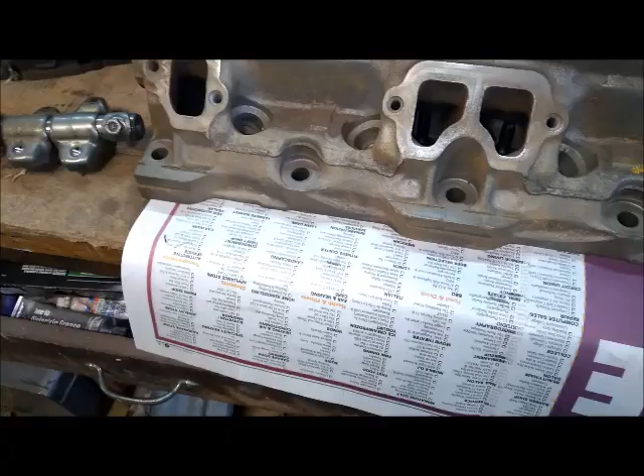I want to talk a little bit more about these 360 heads, I'll call them. So the J head. We're going to check the casting numbers. I have a book here. We'll look at that.

But the casting number is 3418915. I don't know if you can see it right there. 3418915. These are the cleaned up heads that are on my engine that I'm saying have 188. Well, actually, I know for a fact they do. These are an early 70s 360 head, but they're also a late run 340 head.

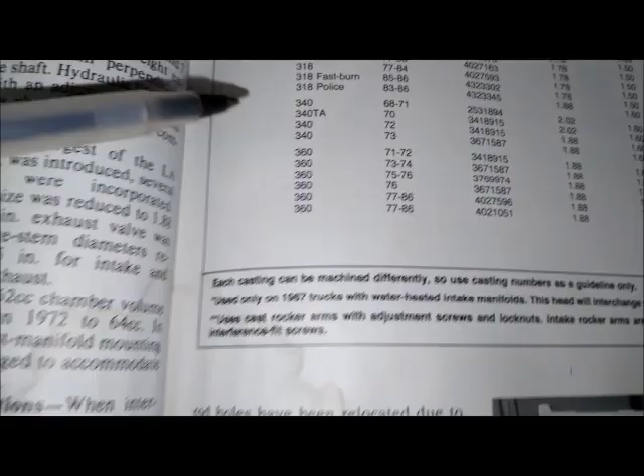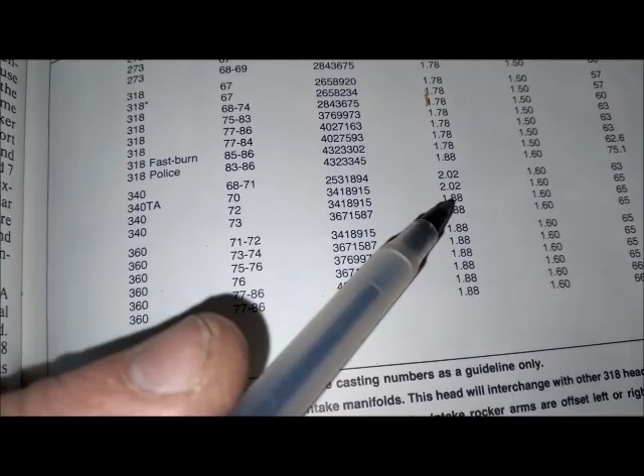So let's look at the book here. So we know they're 915 heads. Let me get a pen so I can point. So looking at the book, 340 1972 had 915 heads. So 188 intake, 160 exhaust, with a 65cc combustion chamber with a non-adjustable valve train. So that's your shaft mount rockers, the lifters pump up, tighten everything up.

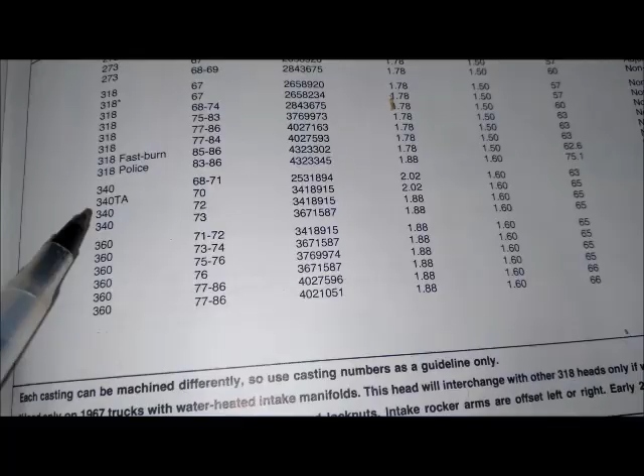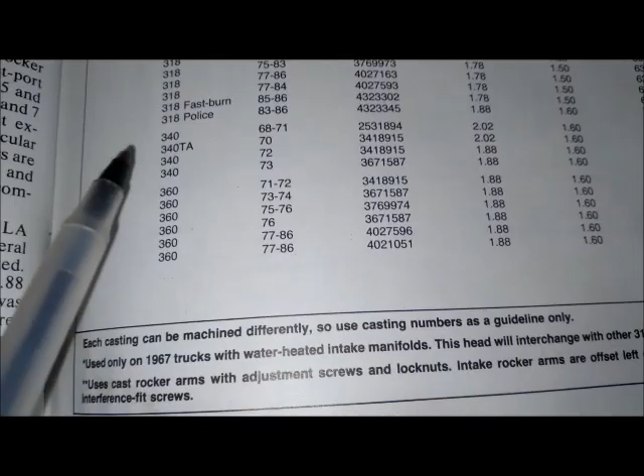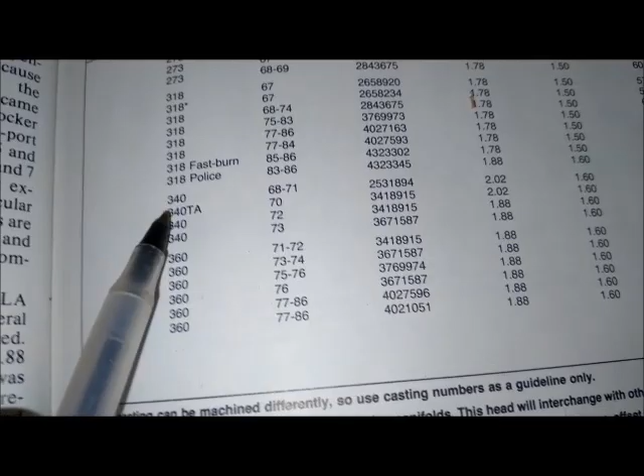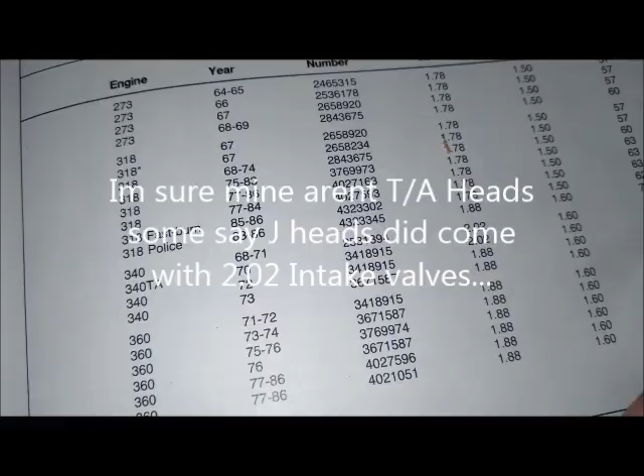360, 71 and 72 had 915. Same situation, 188, 160, 65cc combustion chamber. Now, I have an identical casting set of heads over there with 202s in it. The 70 340 TA had that 915 casting with 202s, 65cc chambers. I do not believe those are TA heads. I do believe they were possibly 72 340 or 71 72 360 with 202s installed. We will take a look.

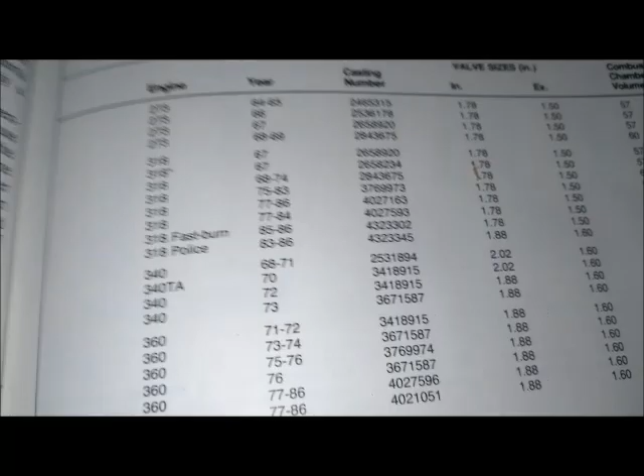Some people have said that some of the J heads had 202s, and this is like old heads that were around back in the day and actually tore these cars apart when they were a few years old. But let's turn this up and we'll look at the valves.

Oh, should wear gloves when you're handling castings. Your hands will get boogered up quick. All right. Any type of mechanics glove like that. I just didn't have any on. And my fingers got pinched a little bit.

All right. So those are your 188, 160s. Over here, it's dirty, but these are 202, 160. I'm trying to see if I have any way I can clean this up.

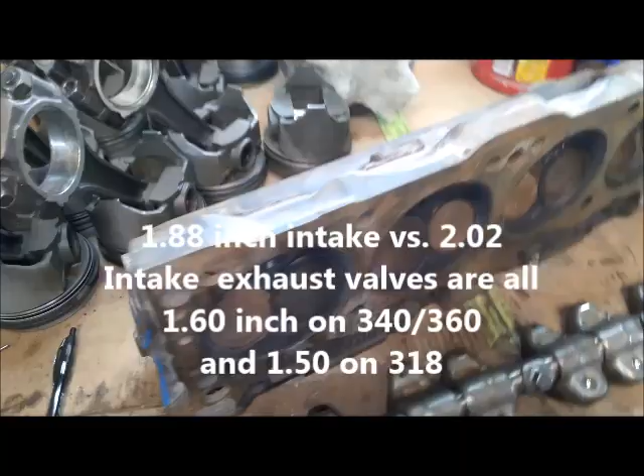So I picked these heads up. I started this 340 build. I was going to get those J heads redone. And I came across this other set of J heads with 202s. And I picked them up. They were less than 300 bucks. So I don't know the condition yet. Like, say they were 285, whatever they were. If I can't rebuild them, then it's 285 out the door, but that's the gamble.

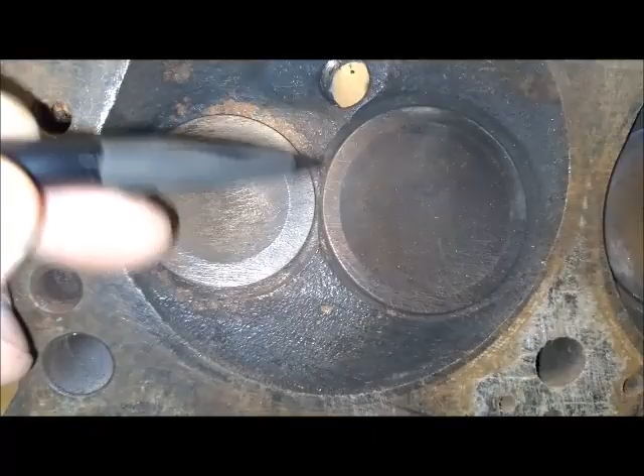These are the 202s, and if you can see, very tight space in between. It almost looks like the valves are touching. The 188s has more of a visible area of metal between the valve seats.

So that's the scoop. Like, if you look naked eye, you look at a set of heads, looks like the valves are touching each other. They're 202s. I don't know if you can see the difference there between the 188. I can see it right there. You can see it with the naked eye, the bigger intake valve.

So while we're talking about these 65cc combustion chambers, right? So this is the problem putting these heads on an LA 318. The LA 318, at top dead center, the pistons were not zero deck height. They were like negative deck height, which means at top dead center, the flat top piston's still down in the bore.

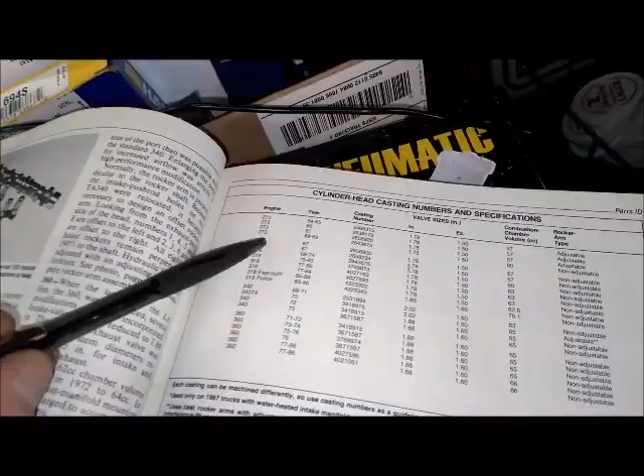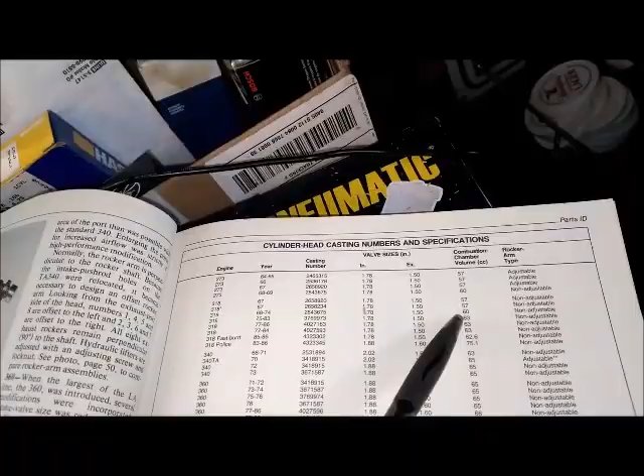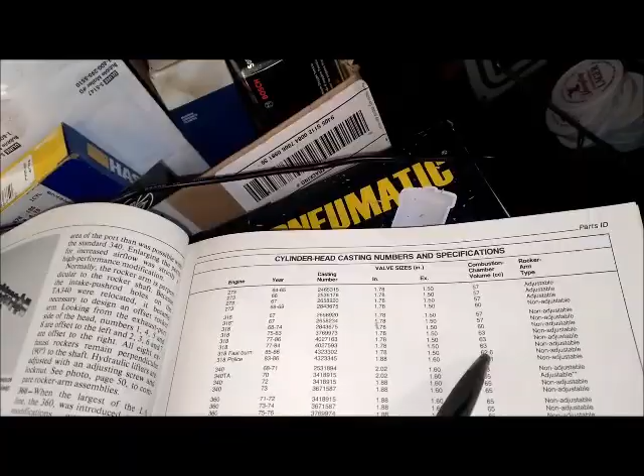So the 318, let's look at the compression cc's of 318 heads. 67, it was 57 cc's. 68 to 74 went up to 60. 75 to 83, they were up to 63. 77 to 86, they were at 63. 77 to 84, they had a 63 cc chamber. 318, 85, 86, they had a fast burn, 62.6 cc's. The 318 police, 83 to 86: 188, 160, 75 cc's. That was actually a modified J head.

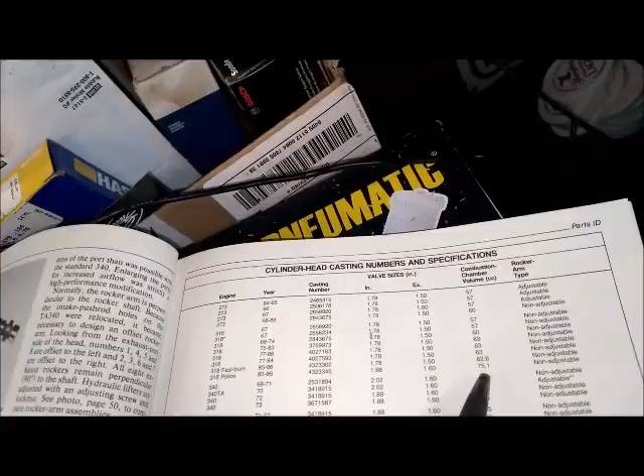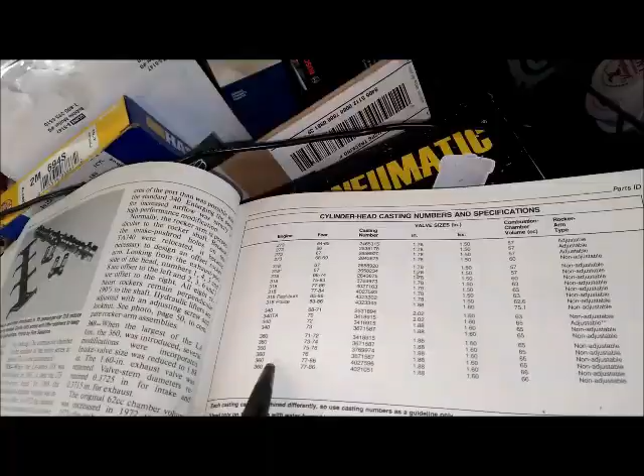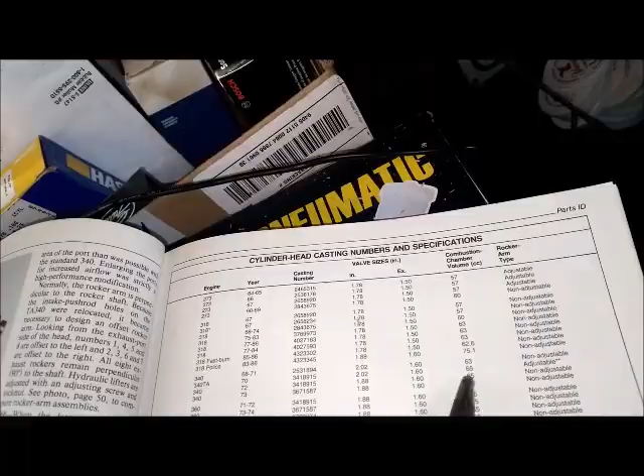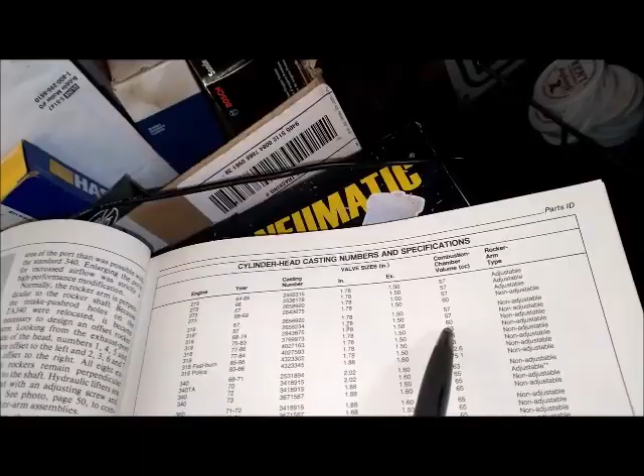But point is, let's say you're taking a 68 to 74 318 with a 60 cc chamber. You throw a set of 340 heads on. The J heads are bigger, 65. The 68 to 71 340 had a 63 cc chamber. I believe those were the X heads. So say you throw these later 360 heads on, they're 65 cc's, and you're going to throw it on a 68 to 74 318 with a 60 cc head. You're adding 5 more cc's to your compression ratio, if that makes sense.

You're making everything bigger. You already have negative deck pistons, so you're effectively lowering your compression ratio. That was the thing. You throw these heads on a 318, it opens them up for flow, but you lose compression ratio. The early 318 was already like 8.5 to 1. So that's the thing with that.

Another thing with these heads, we're going to look at the, let me see if I can lower this down without smashing my fingers.

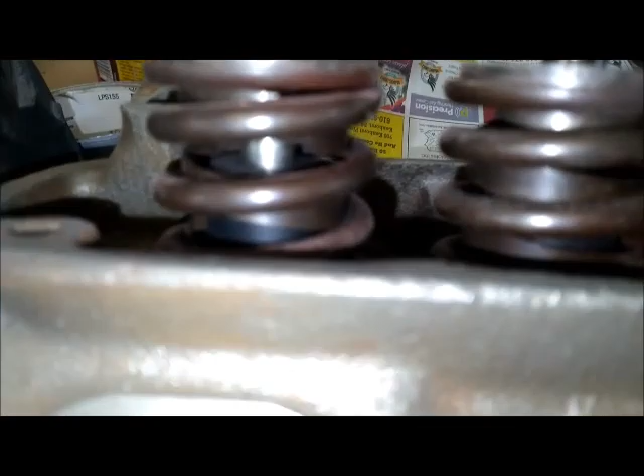If you look in there, those are dampers. These could in effect be called double springs, but there's a damper inside this larger coil. Your LA 318s will have a smaller diameter single coil.

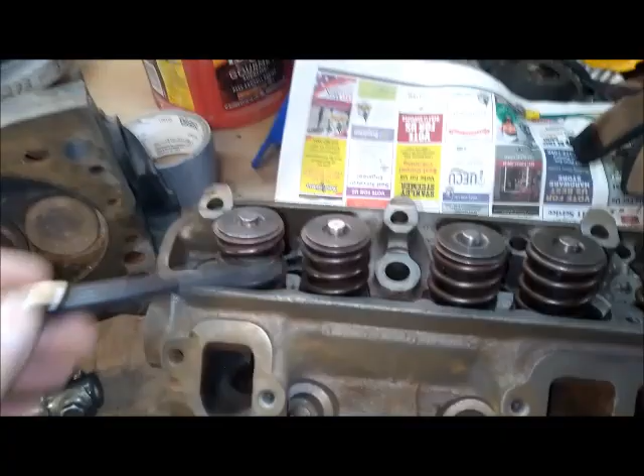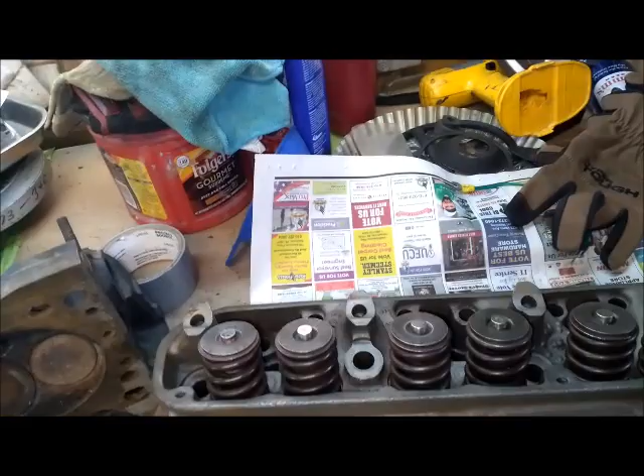And keep in mind that the 318 two barrel had like a 400 thousandths lift cam. It might have been less than that, high 370, 380 thousandths lift. So they weren't high lift, they weren't high rev. So you put a hot cam with standard LA 340 heads and you try and rev it, you might run into valve float situations because of the springs.

That's another thing. The stock LA 318 heads, in my opinion, are one of the biggest problems trying to get performance out of a 318. It'll run good, it'll sound good, and it'll do a burnout, but you're running it down the track. Anybody racing a 318 successfully has good heads on it. They're not running stock 318 heads.

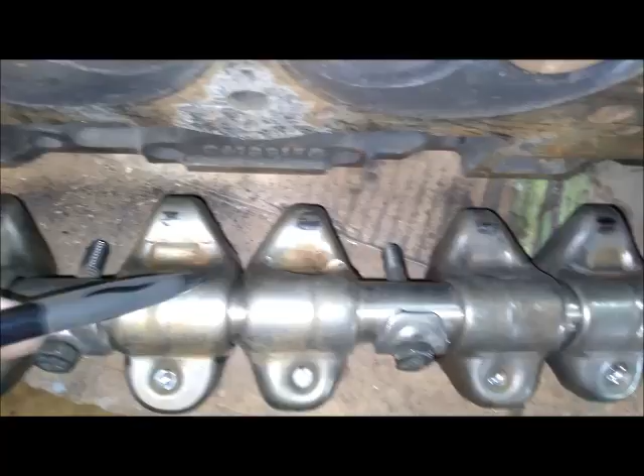What else? Oh, yeah. So because of that bigger spring, this part of your 318 LA rocker may be smaller, machined smaller for the smaller spring. If you try and use 318 rockers on this bigger spring setup, this part of the rocker might jam up here and your tips might not even come down and touch the valve.

I'm trying to think if I have anything else on that. Like I said, this is all LA stuff. So people that talk Magnums and call them 318s, I'm not talking about the Magnum. I'm talking about LA, the late 60s, early 70s stuff.

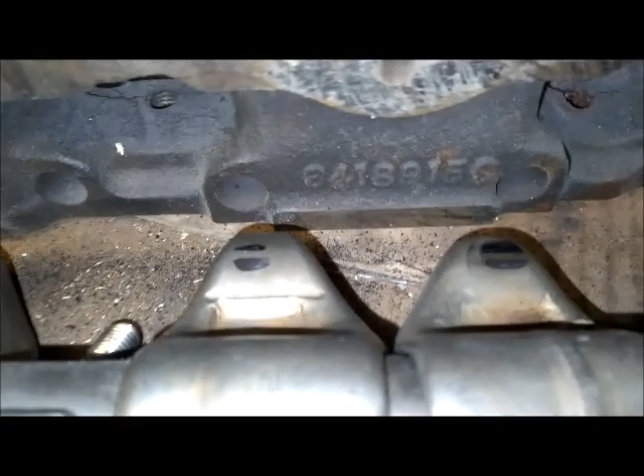Right there's the casting number on that. 3418915. So it's exact same casting as this. It's just that this one has 202s in it, and why I don't know. I will find out when I disassemble and clean them up. It's possible these were modded after the fact, or maybe they snuck through the factory that way.

But the book is telling me both these castings should be 188s, unless it's a 340 TA, which I'm pretty sure those aren't TA heads. If they are, I got really lucky and got them real cheap. And what are the odds of that being true?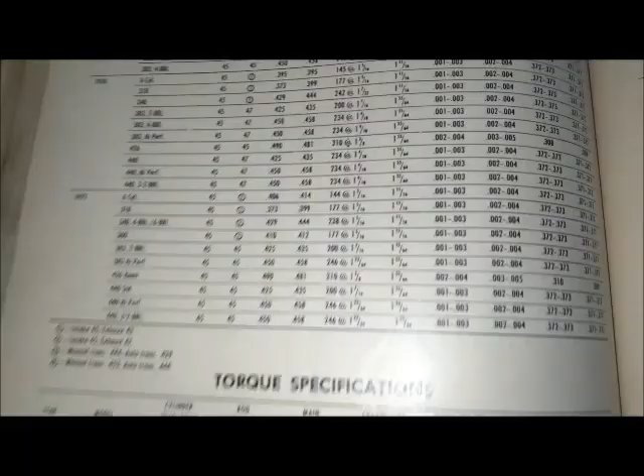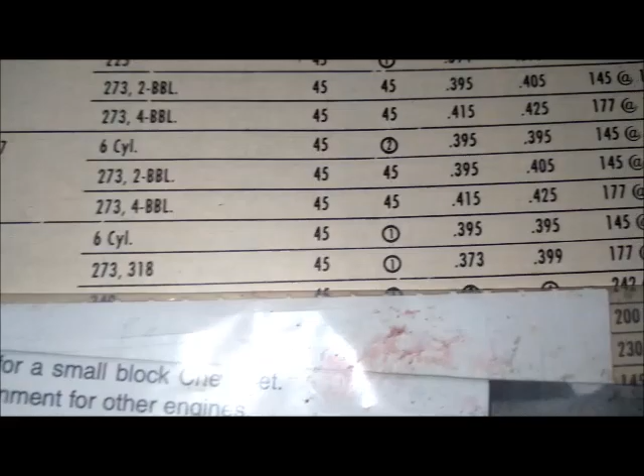I wanted to just clarify, let you guys know I'm looking this up here. I made a statement about the 318 having like a 400 thousandths lift on the cam. So we're just going to look at a 68 318. 373 on the intake, 399 on the exhaust. I just want to make sure you guys know I'm not making stuff up off the top of my head.

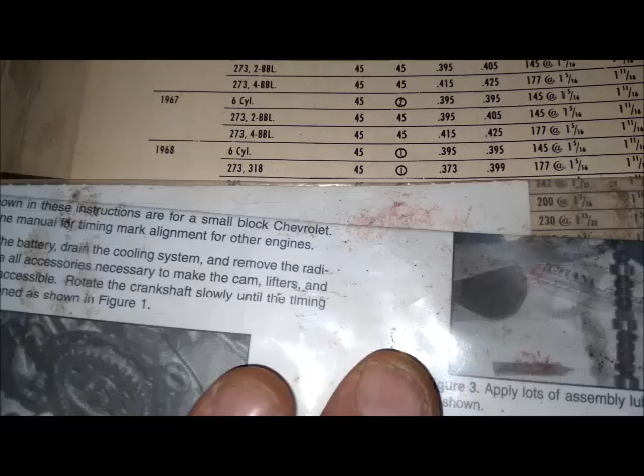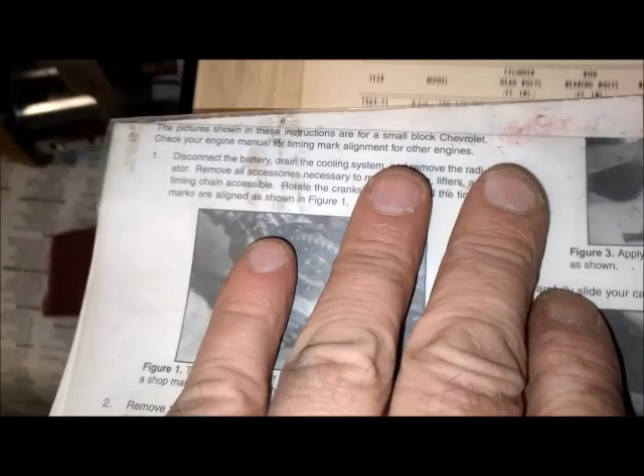Now, the 68 340, there's a footnote 3 and 4. See there, footnote 3 and 4. So we'll go down here. 3. Manual trans 444, auto trans 429. So footnote 3 was on the intake valve. So that's saying a 68 340 manual trans had a 444 lift.

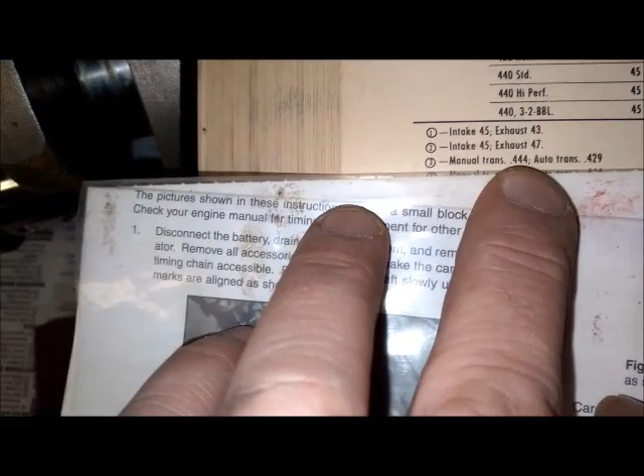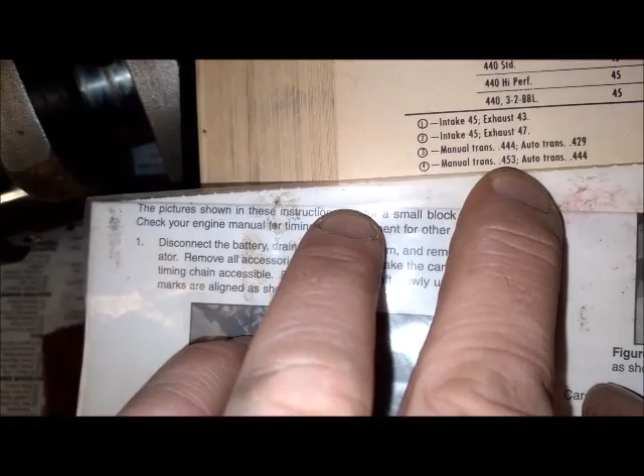Over on the exhaust valve, it was footnote 4. So footnote 4, manual trans had a 453 lift. Auto trans 444. Now, this is a cam card from a Summit.

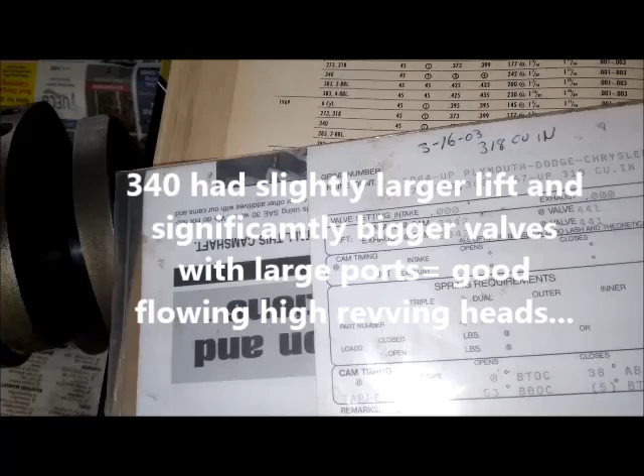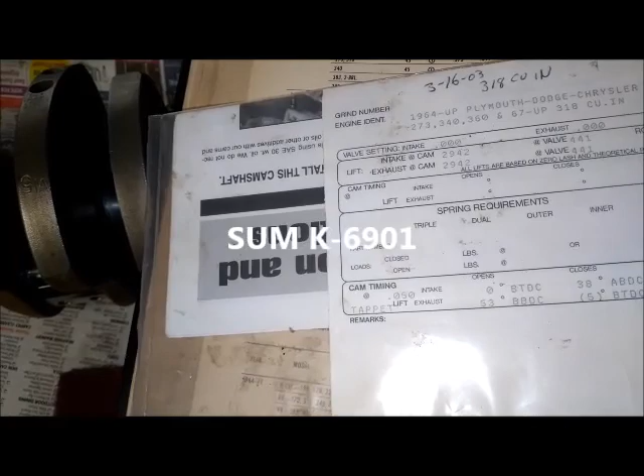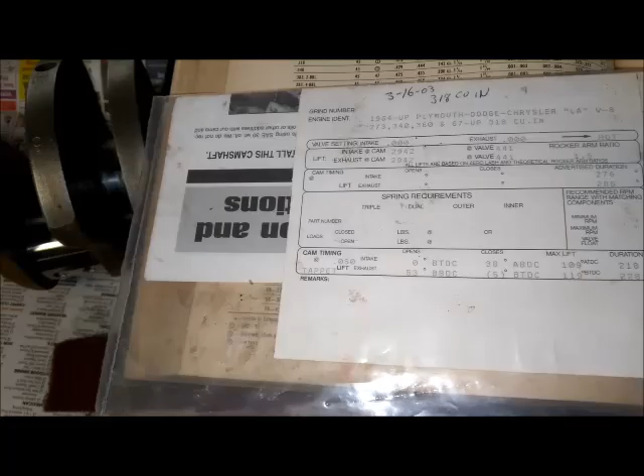What is this one? Let's look at this. This is a Summit cam. It is the, why do I not remember the part number of Summit? But anyway, it's a 441 intake and exhaust. 276 duration on intake, 286 on exhaust. I will find that Summit cam number and put it in the video. It's a standard Summit cam, affordable. They used to be like $150, lifters included.

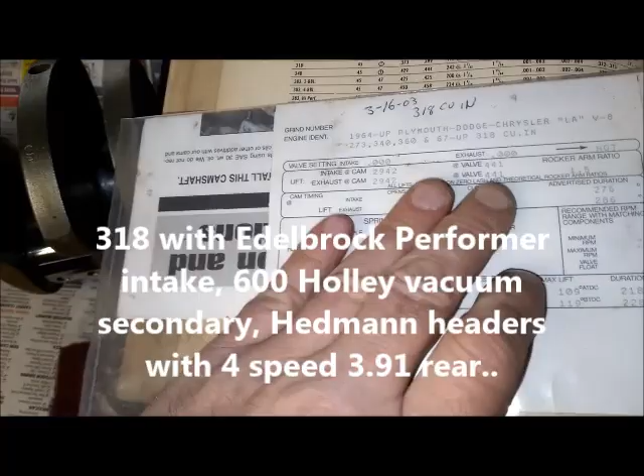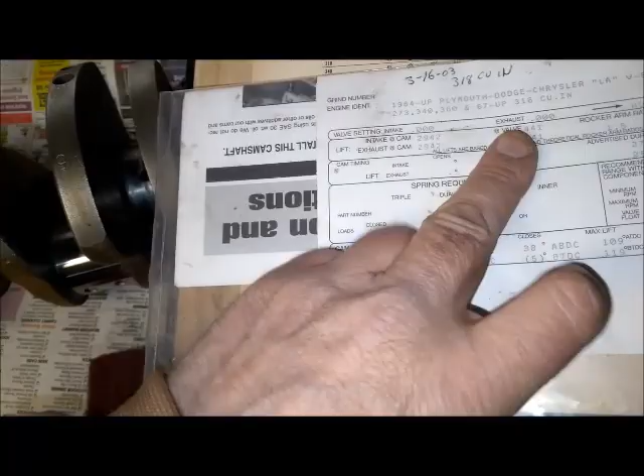I ran this in a 318. It worked, but I did have the stock heads with the stock valve springs, and it only did so much. It was fun because I had a 3.91 rear, but other than that, it ran like a 318 with a 600 Holley on it and headers. It was the standard recipe, what people do, but I just wanted to show you that in the book. 318s are, you know, less than 400 thousandths lift.